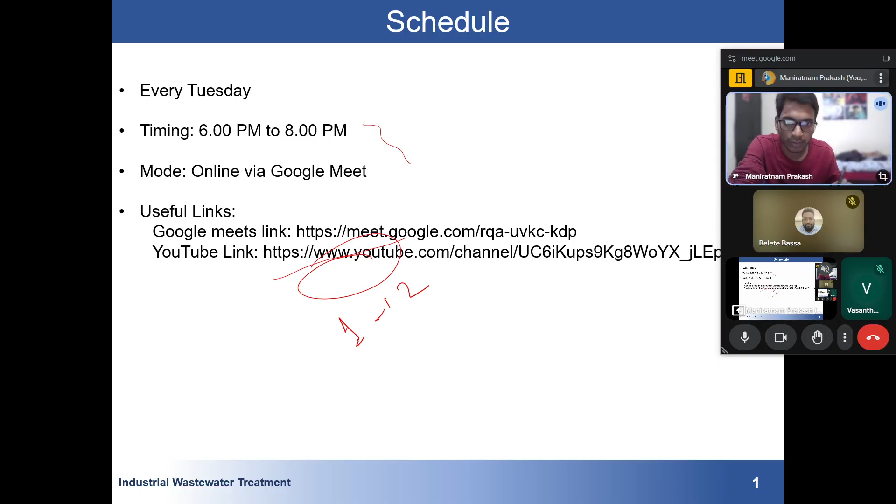Now, in week 12, we were looking at this last topic, about mine industry, whatever wastewater is coming from the mine. The topic was mine wastewater including acid mine drainage and industrial complexes for zero pollution attainment. If you have gone through the lecture, you will be seeing that they were talking about this mine industry.

So here also, like previously in whatever different industry we have seen, like textile or steel industry or tannery industry, everywhere we see that some kind of wastewater is being generated due to utilization of water. So here also in mine industry, there is some production of wastewater, and how that wastewater is being treated will be discussed here.

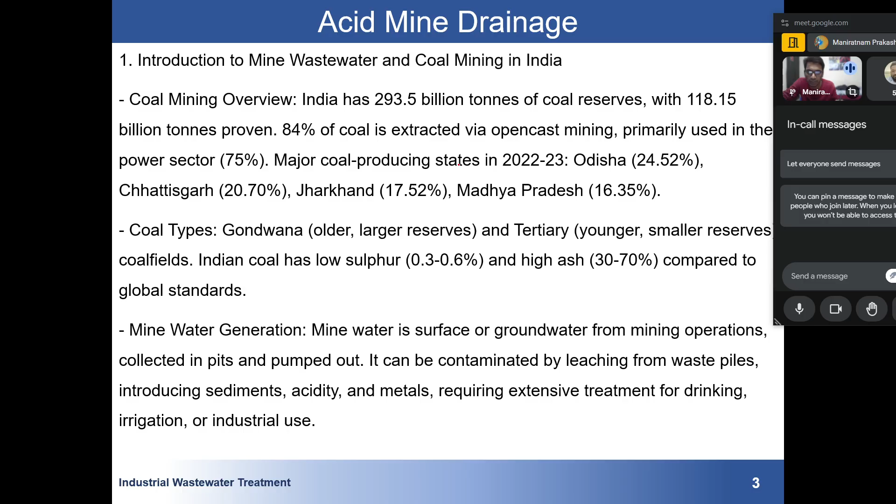Now there is a big misconception that Jharkhand has too much coal, but you can see that only 17% of the coal is produced from Jharkhand. Most of the coal is produced from Odisha, that is around 24%.

Then there are different types of coal, and how this type of coal is produced based on the carbon content. So how much carbon is there in our system, in our coal - based on that, these different types of coal are categorized.

So then we have this water generation. Mine water is surface or groundwater from the mining operation, collected in a pit and pumped out. It can be contaminated by leaching of the waste piles, introducing sediment and acidity.

So what happens - I was going through some internet resources on this - during mine operations, they dig underground and all these things. So when there is too much temperature, and too much dust also, to suppress all this dust and to cool down the surroundings, they use a huge amount of water.

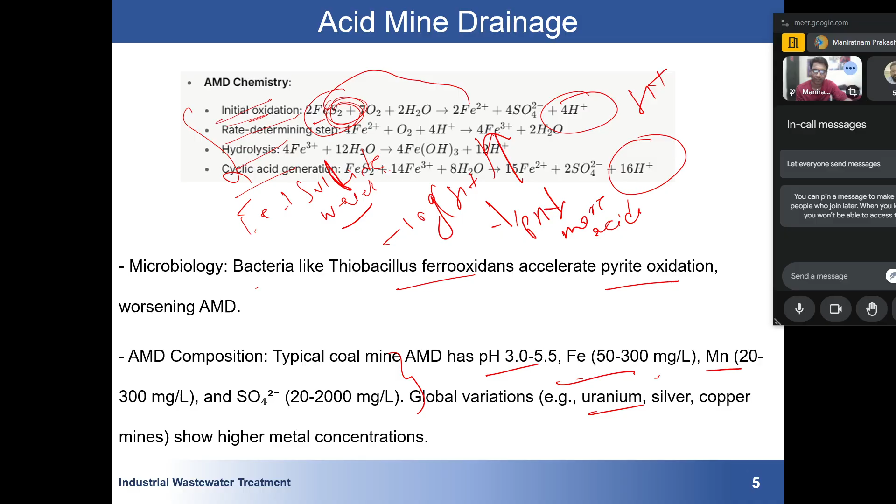So these are some of the concerns: it will contaminate our groundwater pH. Suppose this acid mine water somehow goes into the groundwater; normal pH is 7, so due to presence of high H+, the pH will go below 7 and make it more acidic. That is not good for our groundwater, because it will contaminate it. Eventually we are pumping out that groundwater only, so we have to treat it.

Lower the pH. Deposit of yellow boy, that is ferric hydroxide, which is yellow in nature. High metal concentration; acidic water is harmful for drinking, kills aquatic life, and all these things. So what are the different treatment technologies? For acid mine treatment, coagulation is there, then filtration, then use of limestone, and the process involves some reactions. Whatever reactions are involved are written in your lecture notes. This is just short notes, but for how this cleaning process is done, you can always refer to your class notes.

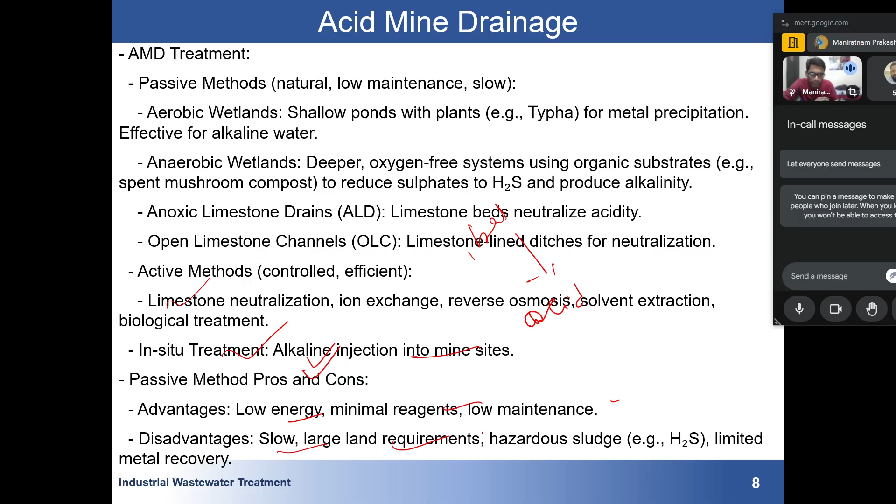Then we have AMD treatment also, that is acid mine drainage treatment. These are some of the processes; I am not going into this. We have in situ, where we treat it directly, then we have pump and treat method also, where we use limestone and all in situ. We know that our water is acidic in nature, so if we have acid, we can neutralize it by adding base or alkaline. That's why alkaline injection at the mine site. It's low energy, minimum reagent, low maintenance, but it is very slow and a large amount of land is required.

Then to treat industrial effluent, we have something called industrial complexes or common effluent treatment plant, CETP. There is something called STP, then we have CETP. Does anyone know what is STP and CETP? What is STP? What is STP and CETP?

Sewage treatment plant. Yes, correct. So what happened is that for our domestic purpose, domestic sewage goes directly to our STP, and there is treatment and all these things. But in an industrial area, for example in our Kanpur, we have an STP, but that has a smaller MLD value. Okay.

But as we know, we have the tannery industry here, and a huge amount of chromium or industrial waste is being generated. So to treat this specific kind of wastewater, the water is passed through the CETP. Common effluent: here industrial will be coming, domestic will also be coming, this water will be mixed up, and then it will go into the CETP and be treated.

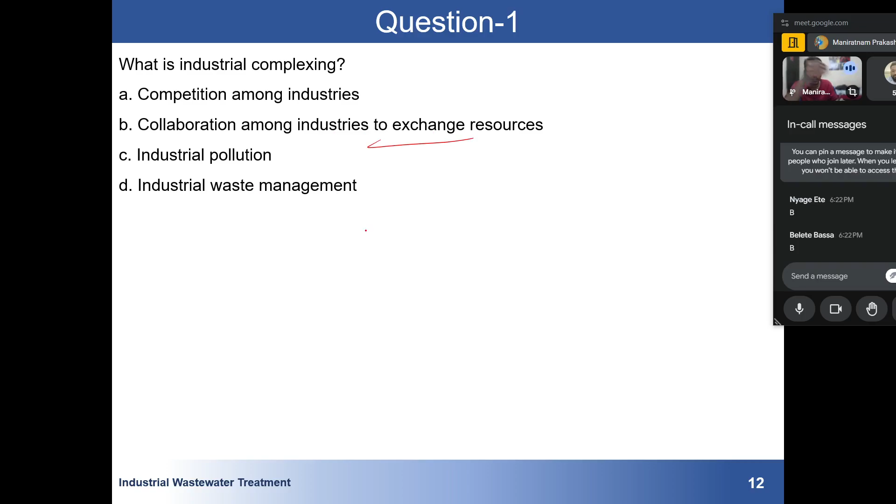What is industrial complexing? Anyone? B. Collaboration among industries to exchange resources. We got one answer. Yes, the correct answer is B, collaboration among industries to exchange resources. Industrial complexing refers to the strategic clustering of industries, for example cement, fertilizer, pulp.

Like we have industry A, B, C. There will be the original product of this industry and some byproduct, and this byproduct will be used as raw material for industry B, and so on. The most common example is the sugar industry and paper making industry: the pulp generated is used as raw material for the paper industry. Cement, fertilizer, sugar, pulp and paper share resources, byproducts and waste streams. For one industry it may be waste, but for another it may be raw material, so sharing gives mutual benefit.

For example, fly ash from the power plant can be used as raw material for cement production. In power plants a huge amount of fly ash is generated because of burning coal, and this burned material can be used as raw material for cement, minimizing waste and treatment costs. The collaborative approach enhances sustainability and often involves shared infrastructure such as CETP to manage wastewater collectively.

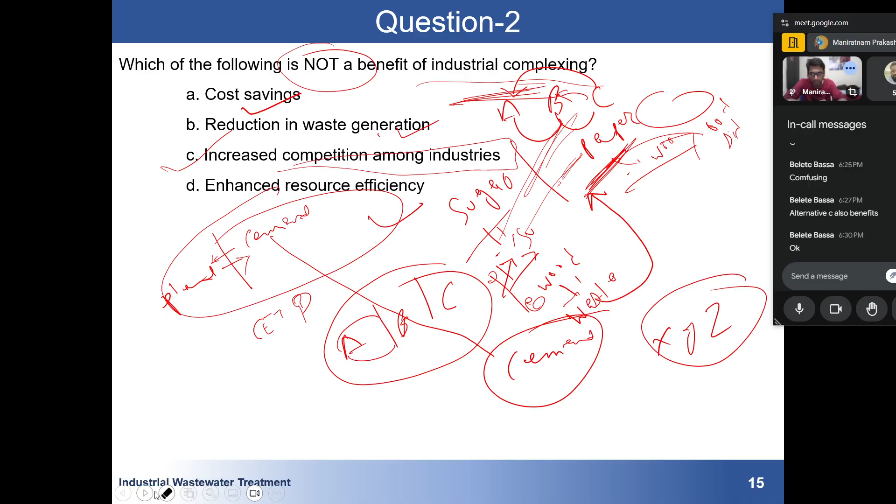So the correct answer is increased competition. Industrial complexing involves collaboration among industries to share resources, byproducts, and infrastructure such as CETP to optimize cost saving. The benefits include cost saving, reduction in waste generation, and cost sharing because shared treatment facilities reduce the individual cost. Suppose A has to build their own CETP, B has to build their own CETP. So there will be some external cost.

So there will be cost cutting and reduction in waste generated. The waste of this may be used as a raw material for that industry, and enhanced resource efficiency, recycling water within the complex. However, increased competition is not a benefit, as complexing fosters cooperation to achieve mutual gains. I don't want two cement industries. Two cement industries can never be doing industrial complexing. Either it will be paper, sugar, cement, power plant, like this.

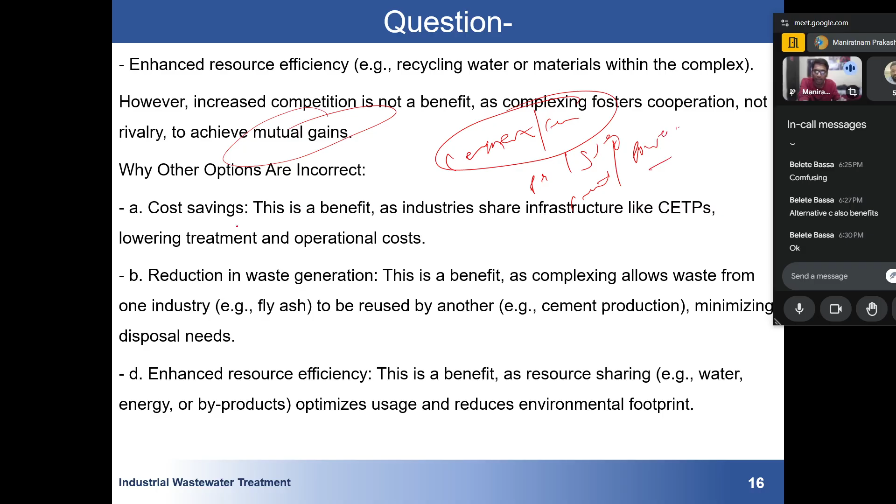Why are other options incorrect? We have said it already. So the correct answer is C, increased competition among industries. Question number 3. Industrial complexing promotes.

It is asking about promotion. A. Yes, circular economic principle. Correct, the correct answer is circular economic principle. Industrial complexing promotes collaboration among industries to exchange resources, byproducts, and waste streams, aligning with the circular economic principle. The example is the same. All three questions were similar questions; it has just been asked in a different form.

Okay, now in a circular economy, resources are reused, recycled, and kept in circulation to minimize the waste and environmental impact. For example, in industrial complexing, one industrial waste, fly ash from the power plant, can be used as a raw material for cement production, reducing the need for virgin resources and landfill disposal. So the cement industry won't be going anywhere else to get their raw material, or it won't be affecting the natural raw material. It will be just taking the waste material that is produced from the power plant.

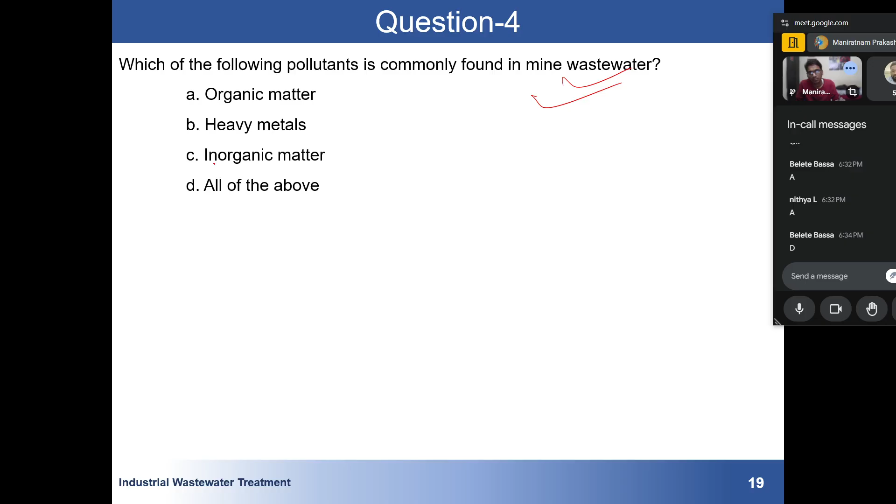Question number 4. Which of the following pollutants are mainly found in wastewater? This we discussed a few minutes ago when I was recapping. D, all of the above. Yes, correct. Mine waste originates from surface water, groundwater, and process water in mining operations, and can contain a variety of pollutants depending on the mine type, geology, and activity. Characteristics of mine water include acid mine and alkaline mine water, and collectively include organic matter. We have seen that COD and BOD were very low, which means there is a small amount of organic matter, but it is there.

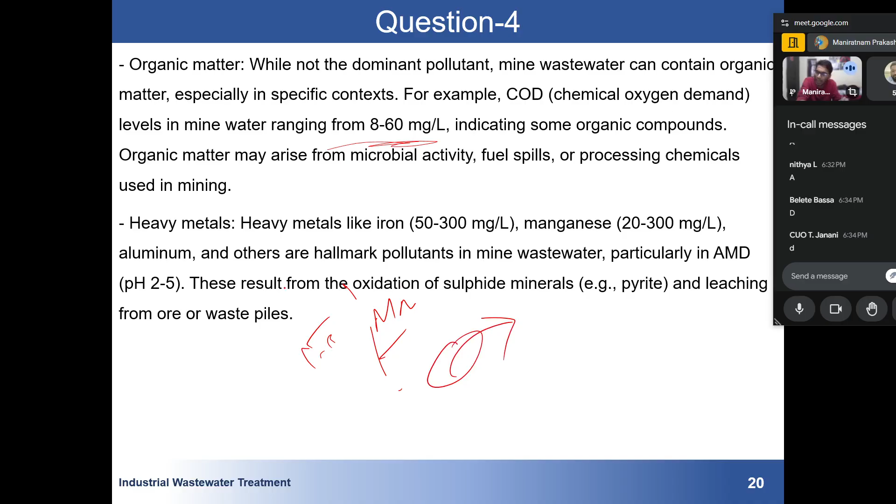And we know that in our wastewater, in our soil, we have a very small amount of organic matter. So you can see that it is ranging between 8 to 60 milligrams per liter. Heavy metals: we know that iron, Mn, manganese, all these minerals are there in our soil, and they will leach out. So heavy metals are also there. Then inorganic matter: there is a huge amount of inorganic matter, sulfate, chloride, iron, magnesium, and these are also inorganic matter. Since mine wastewater comprises all these pollutants, organic in very small amounts, heavy metals, inorganic matter, all of them are accurate when considering the broad scope of mine wastewater characteristics.

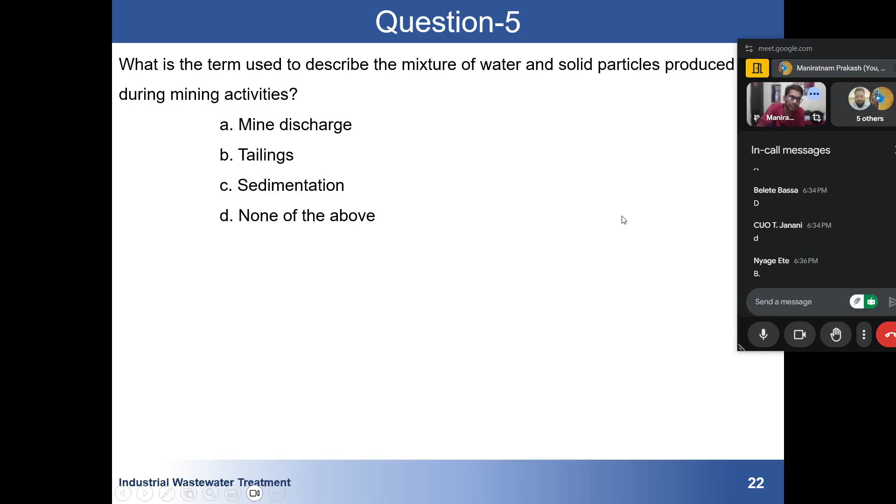Question number 5. What is the term used to describe the mixture of water and solid particles produced during mining activity? What is the term used to describe the mixture of water and solid particles produced during mining activities? Okay, B. Yes, the correct answer is B.

So, tailing is the term used to describe the mixture of water, fine solids, and residual chemicals produced during mining activity. Tailings are generated when ore is processed to extract valuable minerals, leaving behind a slurry of ground rock, water, and sometimes chemicals used in the process. We know that the raw material for any mineral is called ore. So to extract any element, suppose aluminum, first we make a slurry, and there are other processes that we are not going into. But whatever is present in this ore will be dissolving in that water. So it will produce a huge amount of suspended solids, solid particles. So this is called tailing.

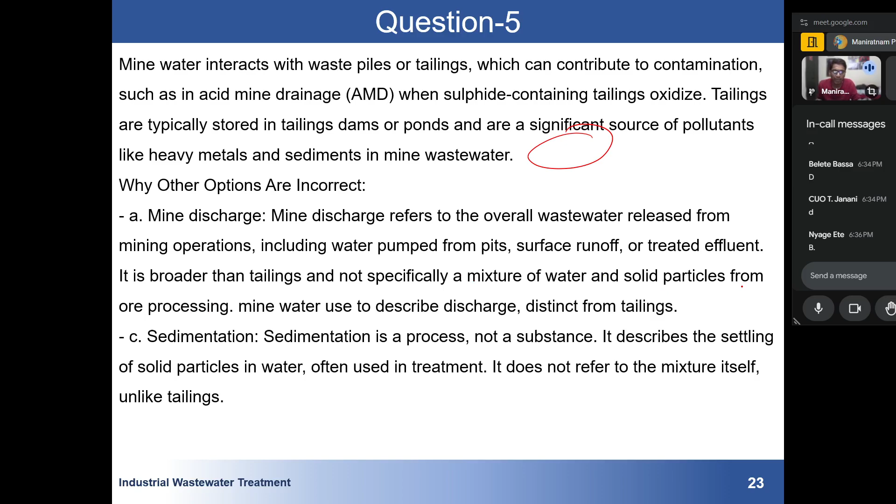Mine water interacts with waste piles or tailings, which can contribute to contamination such as acid mine drainage, where sulfide-containing tailings are oxidized. Tailings are typically stored in tailing dams or ponds and are a significant source of pollutants like heavy metals and sediment, because a huge mixing has been done. Mine discharge is a different thing. Mine discharge refers to the overall wastewater released from the mining operation, including water pumped from the pits, surface runoff, or treated effluent. It is broader than tailing and not specifically a mixture of water and solid particles from ore processing. Mine water is used to describe discharge distinct from the tailings. Sedimentation, we also know: settling. It describes the settling of solid particles.

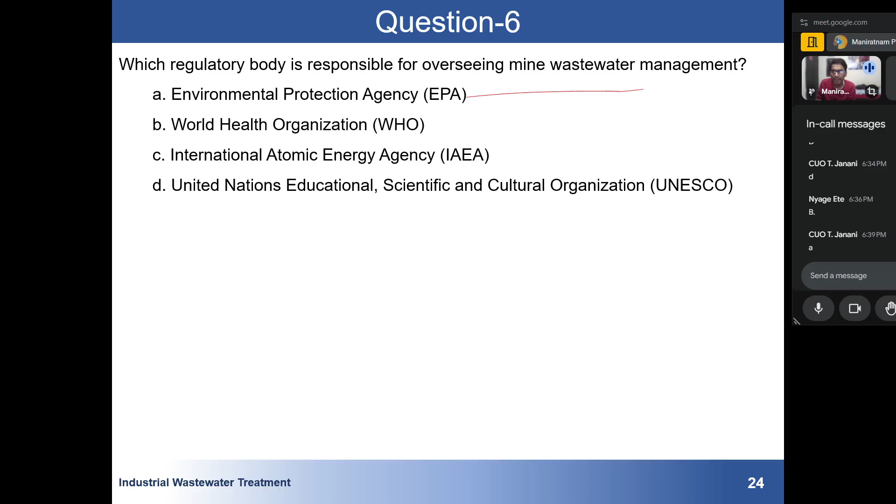Question number 6. Which regulatory body is responsible for overseeing mine water management, mine wastewater management? A. EPA. Yes, correct. EPA.

The Environmental Protection Agency is the primary regulatory body responsible for overseeing mine wastewater management in the United States. EPA enforces regulations under laws like the Clean Water Act, which govern the discharge of pollutants into water nationally. This is not much science, but you should know what EPA is, how EPA works, and for what purpose WHO, IAEA, and UNESCO work.

So EPA also regulates mines, under this thing. Then coming to the other option, what is WHO? The WHO focuses on global public health. It works on health, so whatever health news you might have heard, you will be hearing from WHO. It sets guidelines for drinking water quality, health-related environmental substances, whatever drinking water limits you have.

So if you have read any research paper, you might have seen two things. Suppose they are talking about fluoride. You will see it is always written as per, suppose you are reading in India, then it will be written as per WHO and Indian standard code, IS 10500, the limit is 1.5.

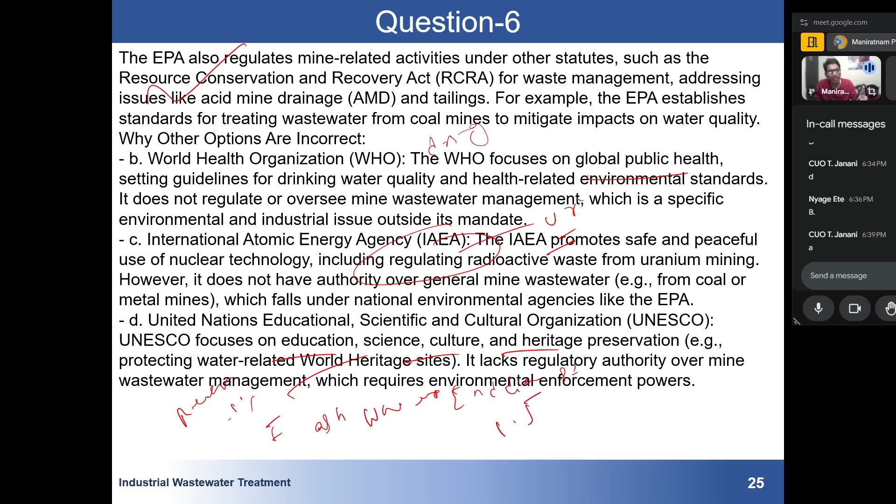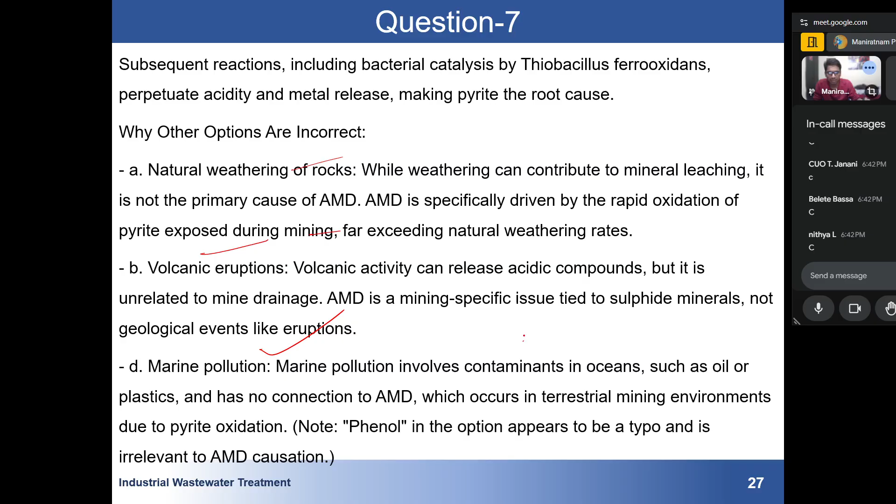Why are the other options incorrect? While weathering can contribute to mineral leaching, it is not the primary cause of AMD. AMD is specifically driven by the rapid oxidation of pyrite, which we have seen. Volcanic activity can release acidic compounds, but it is unrelated to mine drainage. AMD is a mining-specific issue tied to sulfide minerals, not geological events like eruptions. Marine pollution involves contamination in oceans; it's not related to AMD. So the correct answer was C, that is due to pyrite. I hope this is clear to all.

What role do bacteria play in acid mine drainage? Bacteria neutralize acid mine water. Bacteria have no effect on mine water quality. Bacteria promote the growth of aquatic plants. Bacteria oxidize pyrite to form acid mine drainage. D.

Yes, correct answer is D. Bacteria oxidize pyrite to form acid mine drainage. Correct answer. Bacteria, particularly this species and other acidophilic species, play a significant role in acid mine drainage by oxidizing pyrite to form acidic conditions.

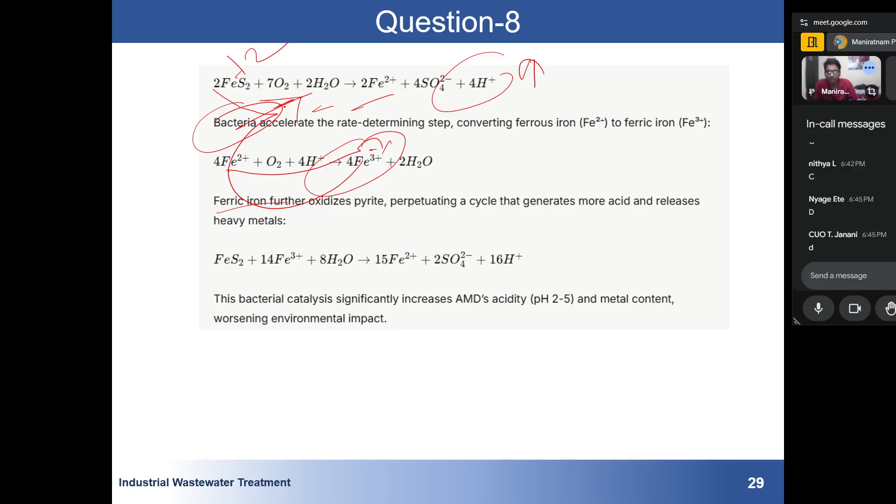Finally this reaction goes in a cycle. Again we have Fe2 plus, and you can see H plus is also releasing here, so pH is decreasing too much. Now this bacterial catalysis significantly increases the mine drainage acidity, pH 2 to 5, and metal content, worsening the environmental impact.

I hope this is clear. Everyone should be familiar with this reaction of pyrite in the mining industry.

Which of the following is not a conventional method for treatment of acid mine drainage? Electrochemical treatment. Anyone else? And we have got one saying aerobic wetland system, someone is saying B also. So we have got two answers, B and C.

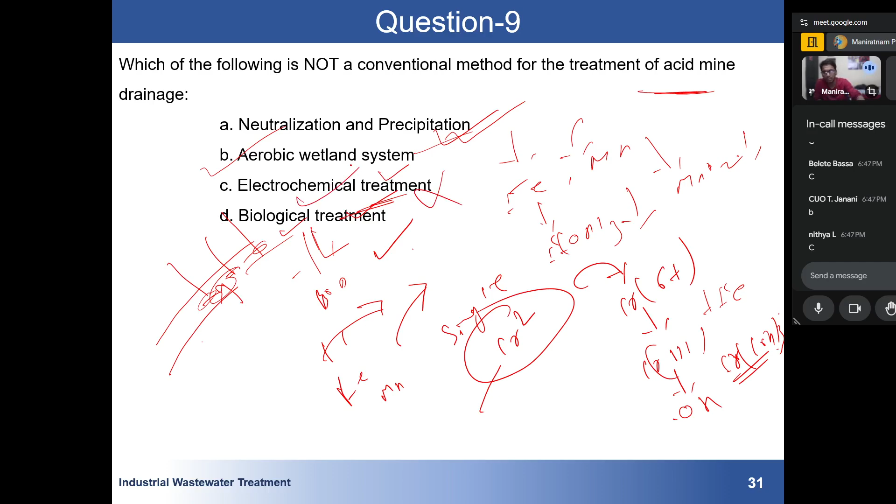Electrochemical treatment. Conventional methods for treating acid mine drainage focus on neutralizing acidity, precipitating metals, and removing contaminants using a stable, widely used process. Based on this context, we covered this.

You can see that neutralization and precipitation involve alkaline agents like limestone. When we add limestone, calcium hydroxide, it will raise the pH, around 10 to 12. At this pH a huge amount of OH minus will be there, so Fe will react with OH to form Fe(OH)2, and if Fe3 is there, Fe(OH)3 will form, and this will precipitate. So yes, neutralization is done this way.

Aerobic wetland systems are passive treatment, shallow, with the help of plants to oxidize and precipitate metal iron, commonly used for near neutral or less acidic mine water. We have seen what wetland is. Water is passed through, and whatever contaminant is there gets entrapped in the plant. Biological treatment is correct, as we have BOD and COD in our water, we have organic matter in water.

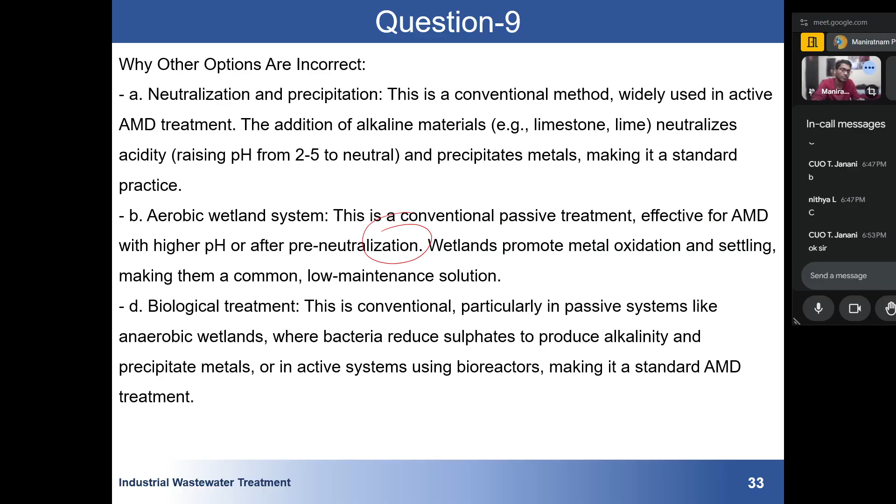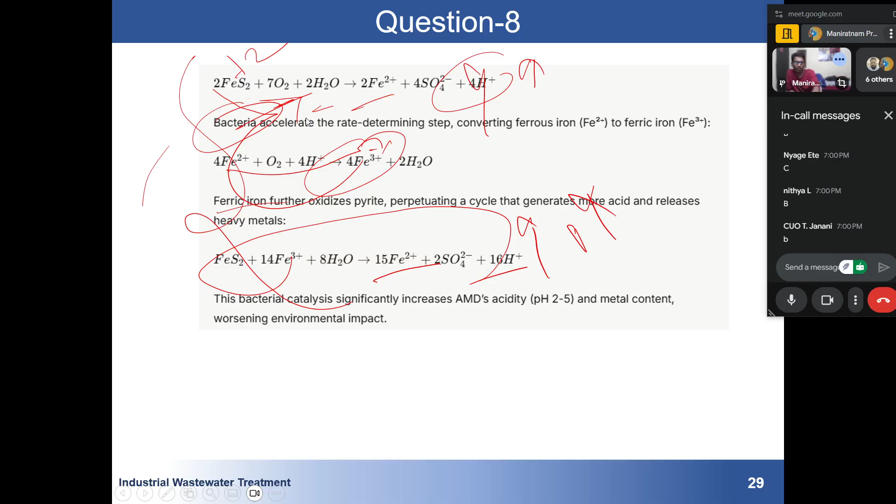But this Fe3 plus, if we somehow remove it, production of sulfate can be controlled. So that is not the limiting thing. The determining step is this itself, the presence of H plus and O2. So I hope the ones who were saying this...

C, and also not a huge amount of sulfate is being produced, very less amount of sulfate is being produced. The main thing is the presence of oxygen and H plus.

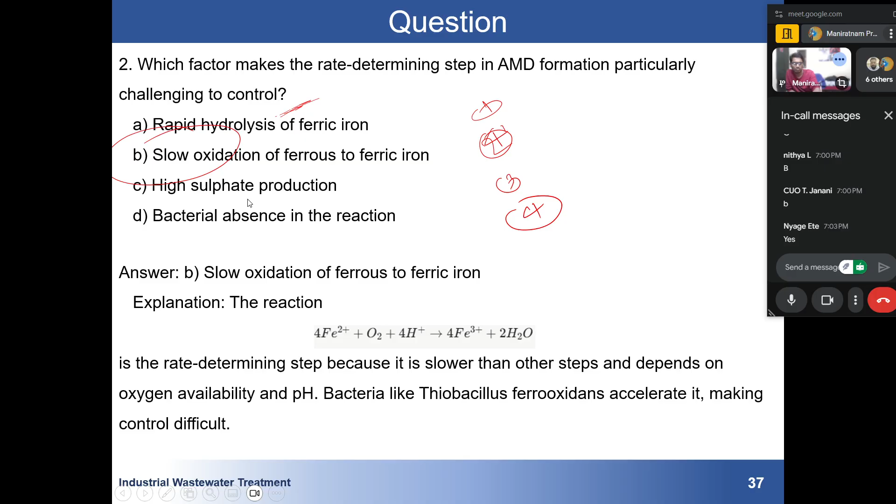Did you get it? Those who were saying C, the problem with sulfate production controlling is that it's not the right step, because sulfate production can be controlled by controlling Fe3 plus, which can be easily controlled by adding alkaline agents and similar methods. I hope you've got it.

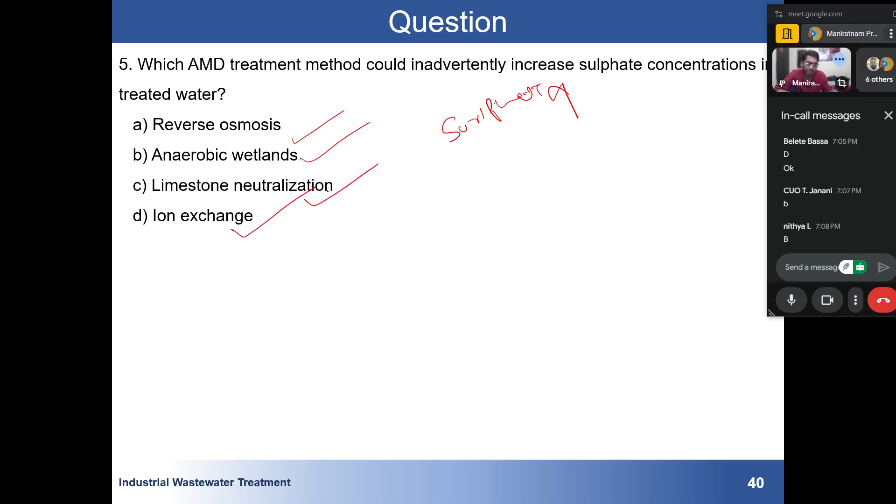We have seen reverse osmosis, anaerobic wetland, limestone neutralization, and ion exchange. Anaerobic wetland reduces sulfate to hydrogen sulfide, but incomplete reduction, reoxidation, or downstream processes can increase sulfate levels. This tricky scenario tests understanding of microbial processes and their limitations. So yes, the correct answer is B, anaerobic wetland.

Because of oxidation and reduction, first sulfate gets transferred to hydrogen sulfide, but again due to reoxidation, there is an increase in sulfate concentration.

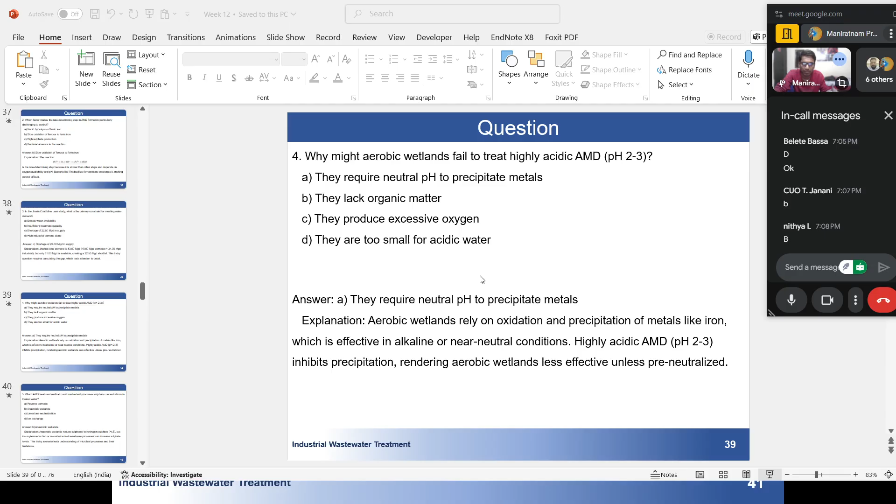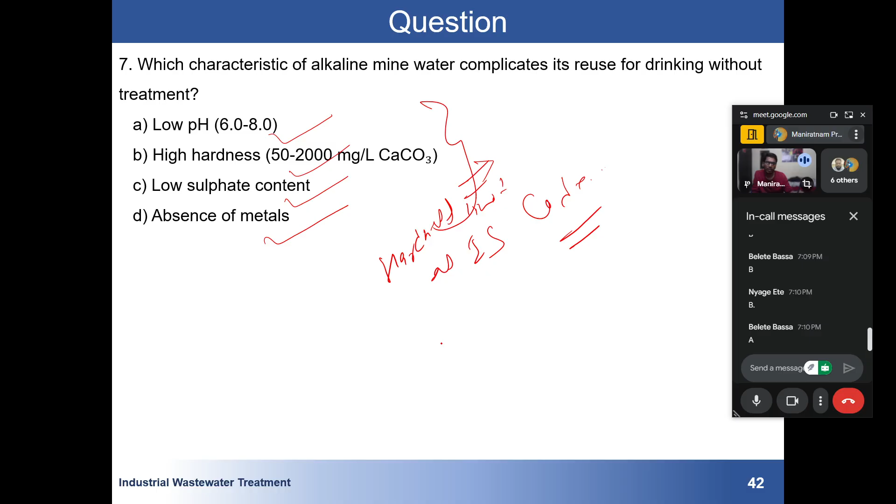B, high hardness. What is the hardness limit, as per WHO, as per our IS code? What is the permissible limit of pH also? Acceptable limit. There is no permissible limit of what? What is the acceptable limit of pH? Does anyone know? Limits of hardness and limit of pH. First, say about pH. What is the limit of pH? Anyone?

Anyone? Is it 6.5 to 8.5 or 7.5? I think it is 8.5. Is this an acceptable limit or a permissible limit? This 6.5 to 8.5, is it acceptable or permissible? You can unmute yourself. No, incorrect. This is not permissible. This is acceptable. pH does not have any permissible limit.

Remember, generally, if you see the IS code, there is an acceptable limit and then there is a permissible limit. Permissible limit is in absence of alternate source. For pH, the limit is written as 6.5 to 8.5, and in permissible limit there is a blank. So this is a common misconception. Many people say that 6.5 is acceptable and 8.5 is permissible. No, that is also incorrect. There is only acceptable. We will only accept water which has a pH range of 6.5 to 8.5, nothing else, not more than that. There is no permissible.

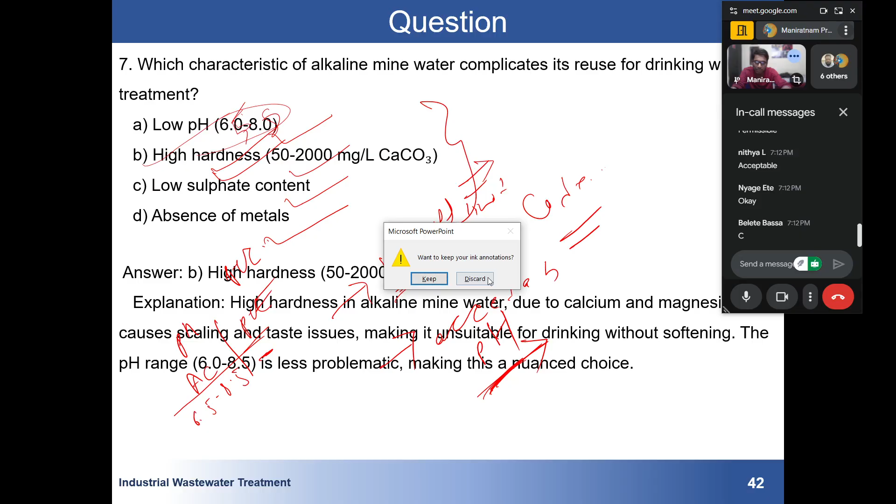This can be a problem, but it is not a very big problem. But this option is also incorrect. It should be 6.5 to 8.5. Then definitely the answer would have been B. Low sulfate content: sulfate should be very low in our water, not high. Let me open the drinking water limits, IS 10500.

You can see this: acceptable or requirement limit and permissible limit. For pH, you can see that it is between 6.5 to 8.5, no relaxation. Similarly, for hardness, total hardness, acceptable is 200 and permissible is 600. We will be accepting water having hardness of this much, and we will be rejecting water having hardness above 600.

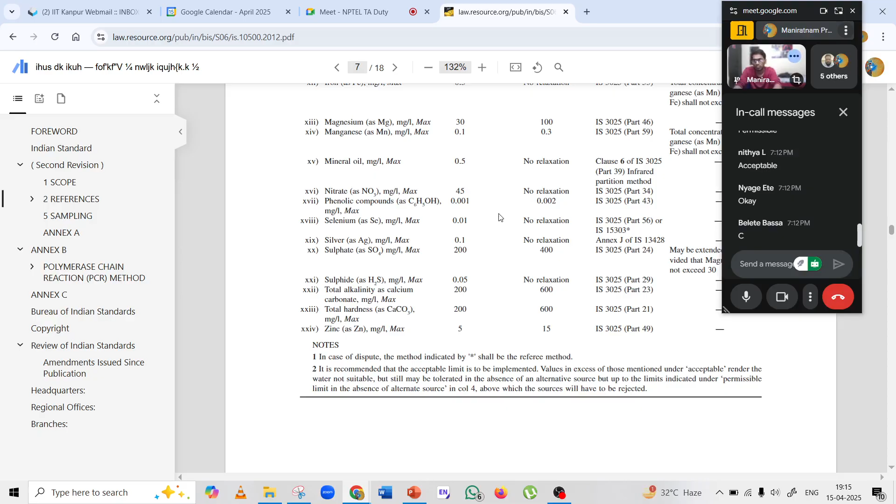When I was appearing for one interview, there was a question: suppose every parameter is within the drinking water limit, but hardness is a little bit high, say 1000 milligram per liter as CaCO3. Will you drink that water? Can anyone answer? Yes or no? Correct answer is no. Even though the hardness is only a little bit high, we won't be drinking it.

And remember one more thing, there is a misconception that drinking hard water can cause kidney stones. This is also a misconception. I don't know the exact explanation of how hard water does not cause it. The misconception is that hard water contains a high amount of calcium and kidney stones are also made of calcium. But formation of kidney stones depends upon many things, like something called oxalate.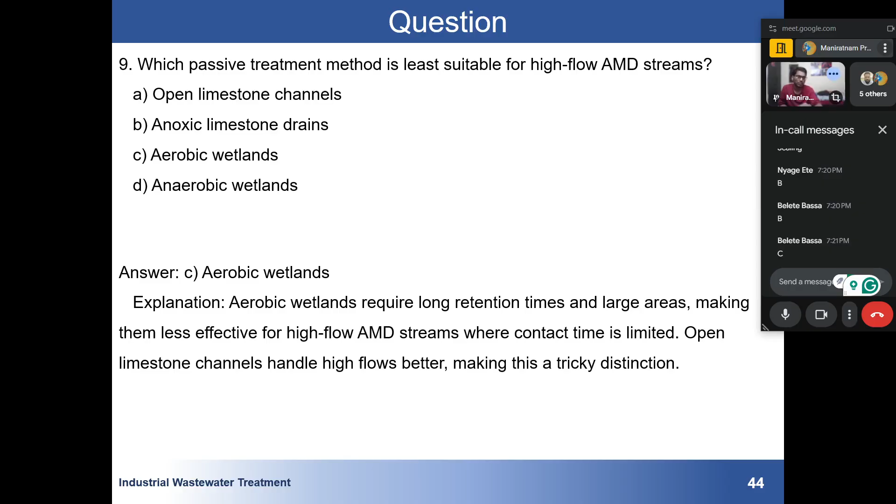But in aerobic, there is involvement of oxygen, and this presence of oxygen makes the reaction slow. So a huge retention time is required, so that's why the correct answer is C.

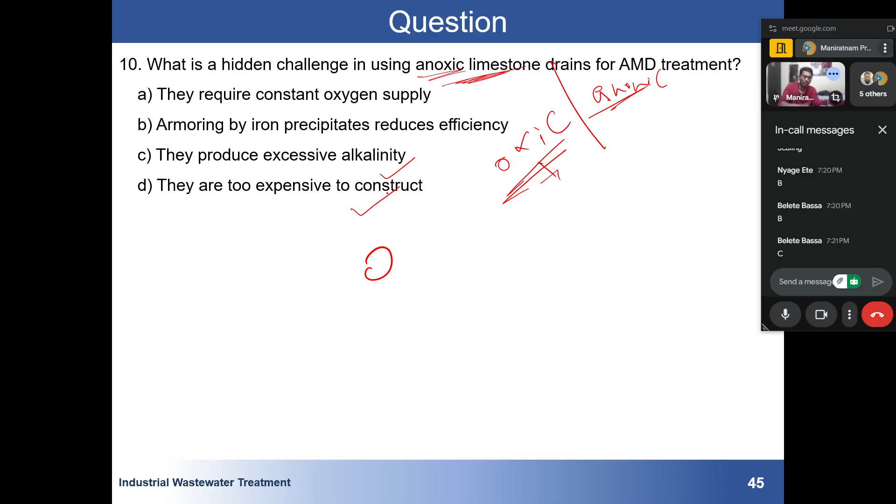What is the hidden challenge in using an anoxic limestone drain for AMD treatment? If we are using anoxic limestone, first of all, what is anoxic limestone? There is oxic, and the name itself suggests anoxic. Oxic means in presence of oxygen, anoxic means in absence of oxygen. So, what is the challenge? Okay, I will say the answer. Armoring by iron precipitate reduces efficiency. The iron precipitate can coat the limestone in the drain, forming an armoring layer that reduces contact with acid water, lowering the neutralizing capacity.

So what happens is the challenge is due to this iron. See, my water is here. If we want to add this limestone, then there should be a proper interaction. But due to this iron, there is a protective layer of iron. This layer reduces the contact time. The contact is reduced by the iron, so there is no proper interaction.

So overall, this reaction is not happening between H+ and OH-. H+ is already in the water, OH- is coming from the limestone. So overall efficiency decreases. So the correct answer is B. Armoring by iron precipitate reduces the efficiency. This iron precipitate is in the form of ferric oxide and all these things.

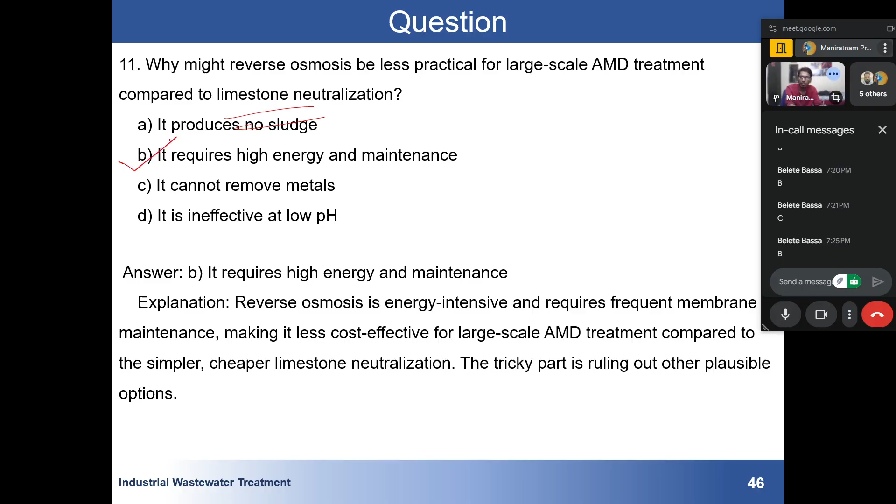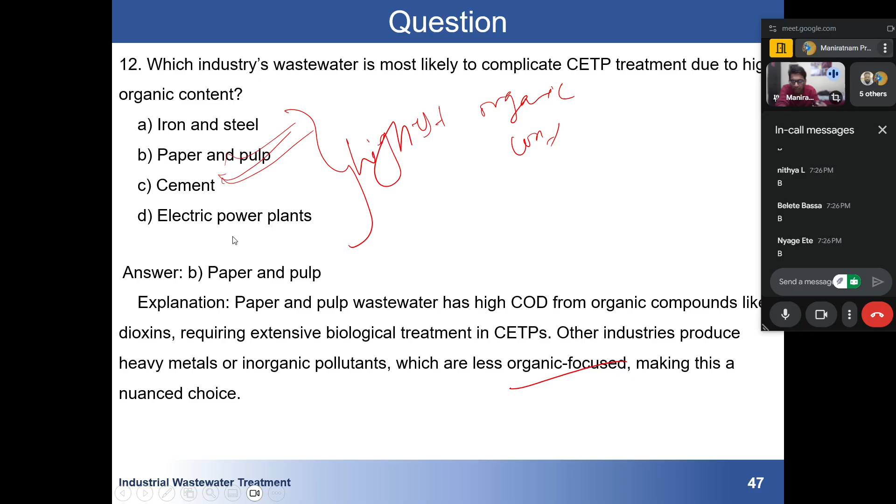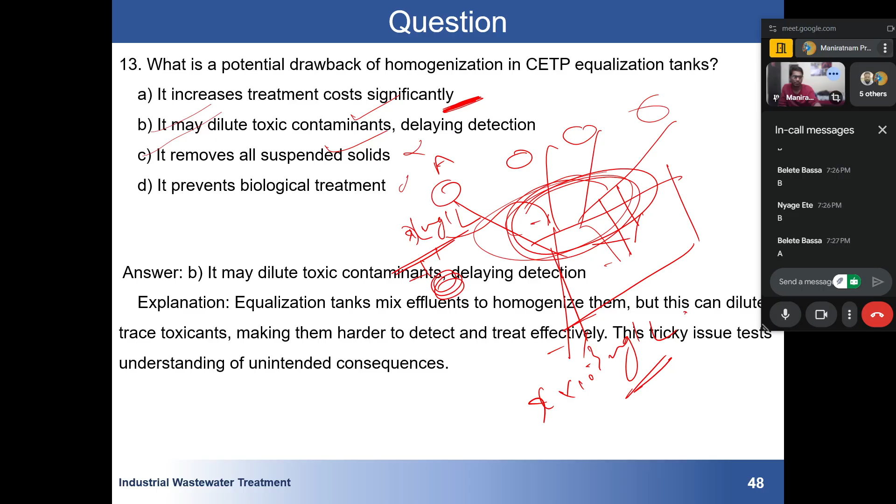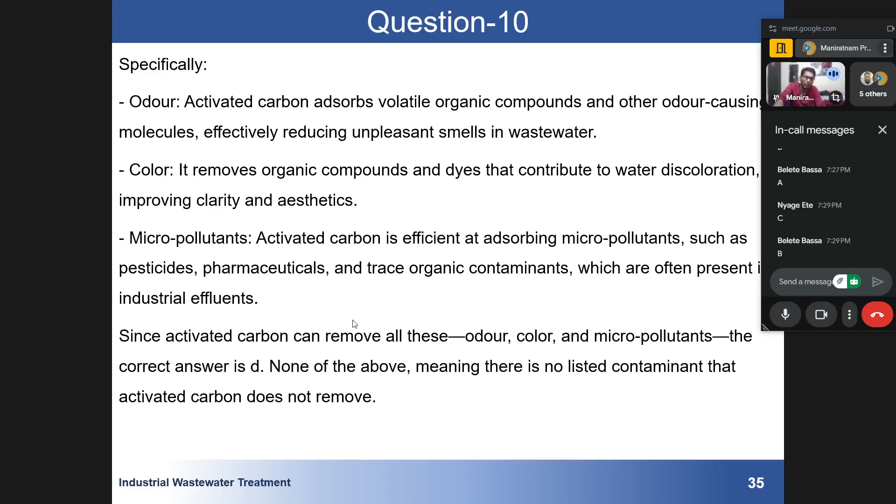Let's see. They are designed for organic adsorption. Activated carbon filters excel at removing organics. See, we have seen this thing in question number 10. Question number 10 we have seen specifically color, odor, micropollutants. You can see only organic things are being removed, and trace organic contaminants. Only organic; this is not used for inorganic contaminants. So I hope you have got it.

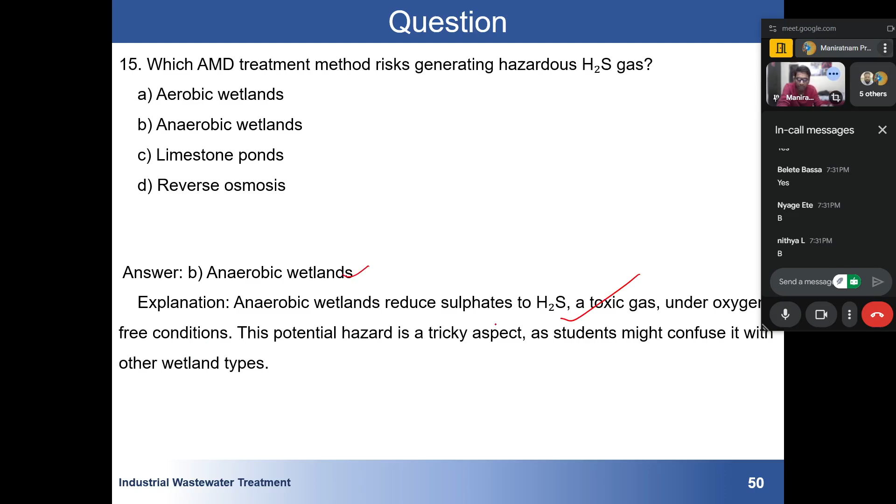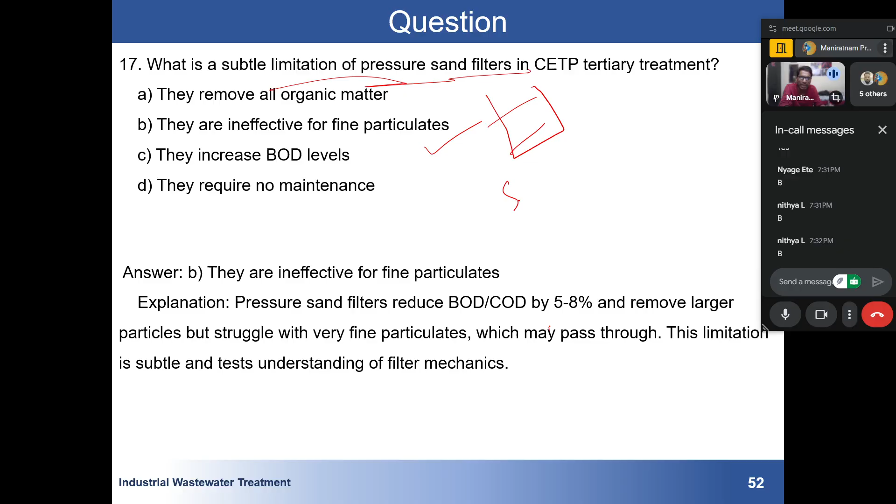What is the limitation of a pressure sand filter in CETP? We know that we have sand filters: rapid sand filter, slow sand filter. So what is the limitation? They are in fact ineffective for fine particles. Pressure sand filters reduce BOD and COD and remove larger particles, but struggle with very fine particles which may pass through. Generally the sand filter is not suitable for fine particles.

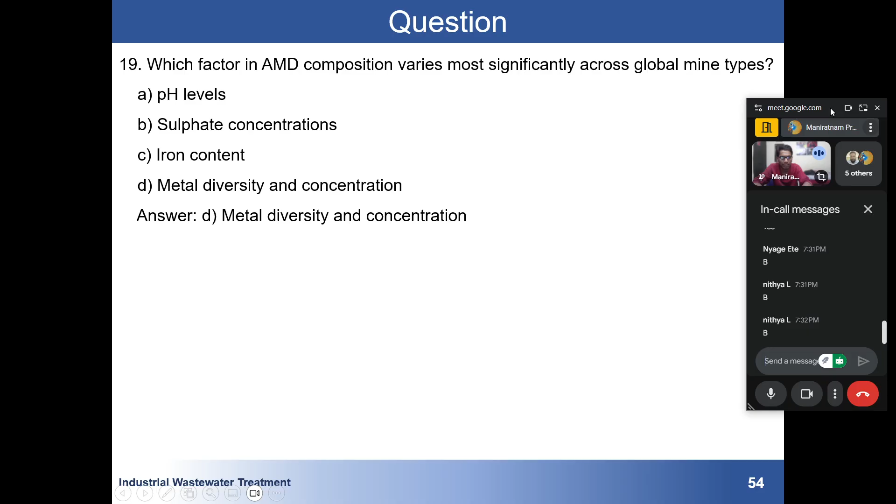Which factor in AMD composition varies most significantly across global mine types? Again, the answer is already written: metal diversity and concentration. While pH, sulfate, and iron are consistently high in AMD, the types and concentrations of metals vary widely depending upon the mine. So the composition of AMD varies significantly.

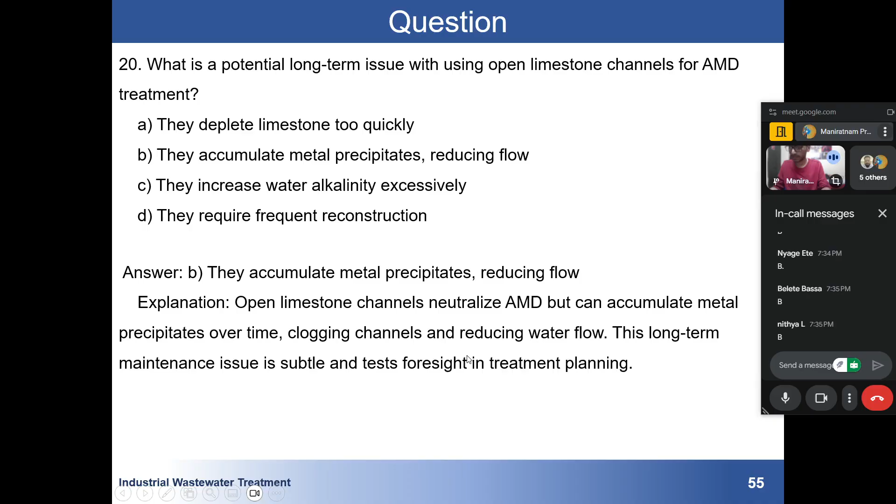I have 20 more questions. I will be going like this only. So before proceeding further, does anyone have any doubt? In week 3, yes. They have not responded yet. I have already mailed them. No, in the PPT. Okay. What is the problem in week 3?

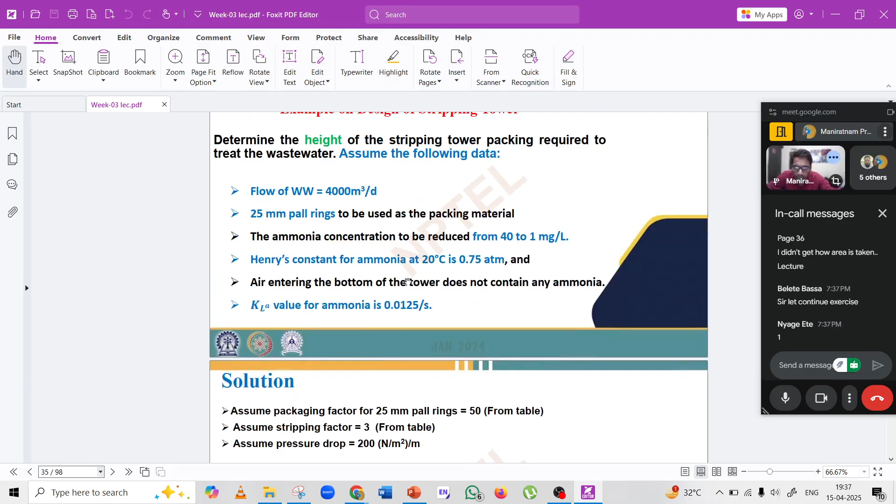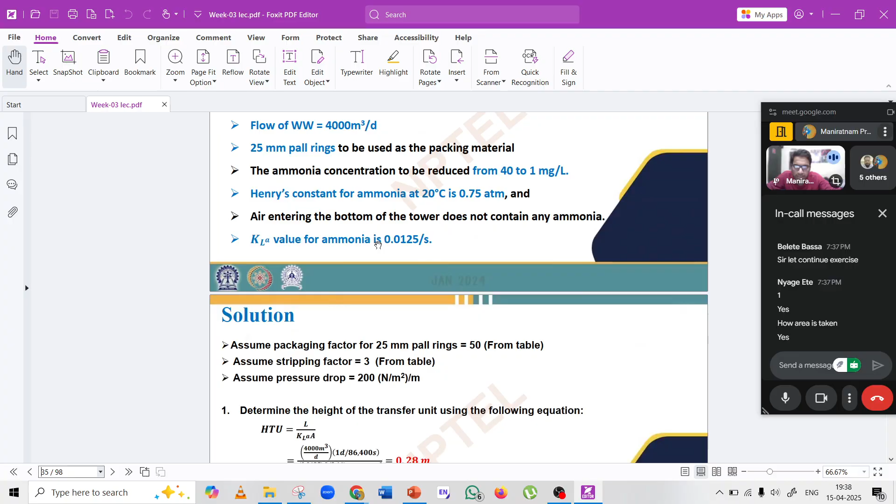Page 36. Let me open. My PPT or the lecture note PPT? Page number 36, this page. Example of design of a stripping tower. The height of the stripping tower, the flow, the Henry constant are given. Determine the height of transfer unit using the following equation, HTU. So what's the problem here? How is the area A taken? I think they have given you the diameter. Let me check.

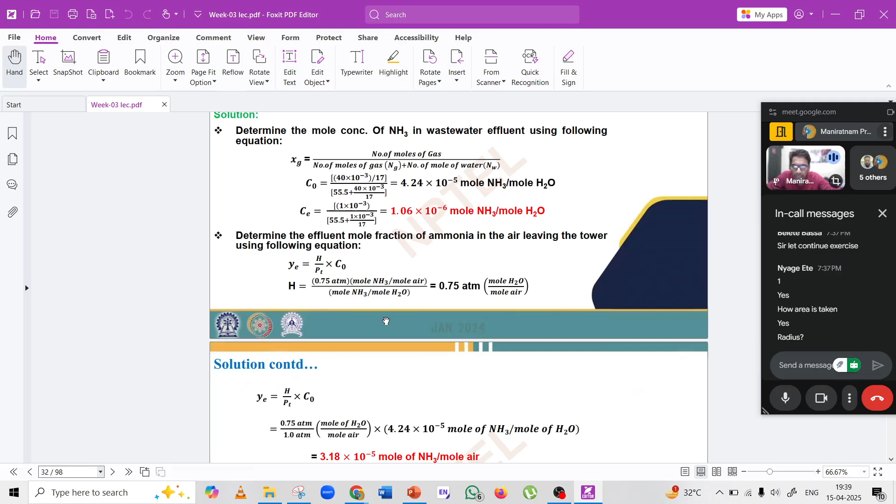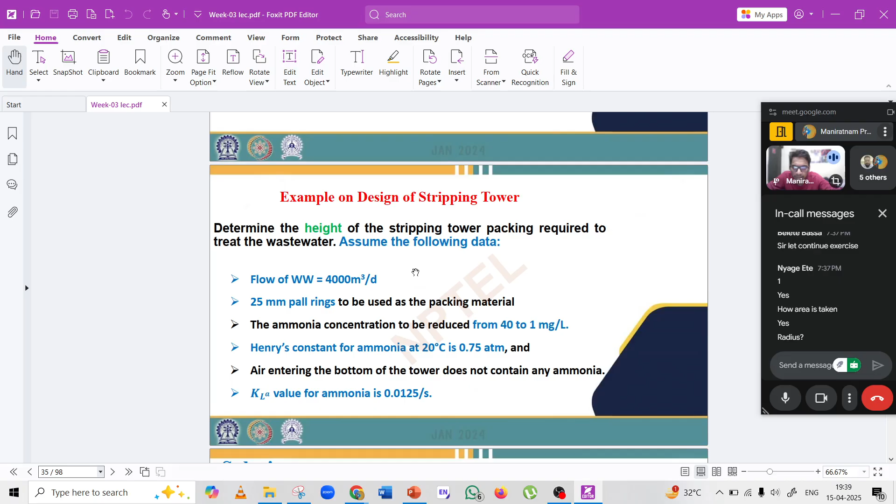L is in meters, 0.035 by 4 r square. So they must have given you the diameter or radius. Let me check: they must have said something about the radius. This is another question: Henry constant, G/L, air required, determine the height of stripping tower. KLa value of ammonia is this much, assuming the packing factor, stripping factor 3, and pressure drop.

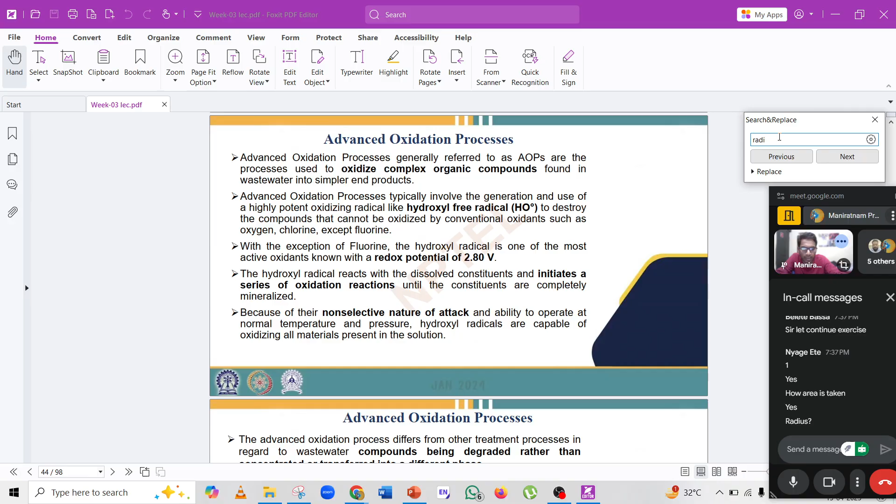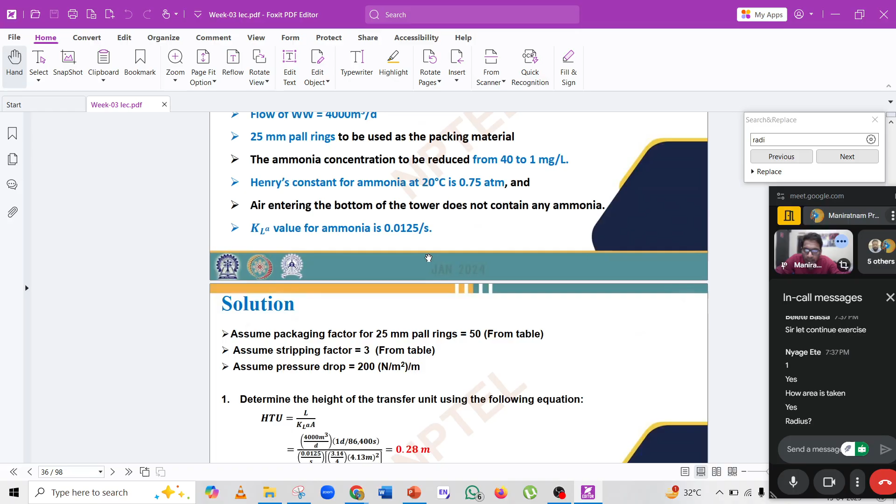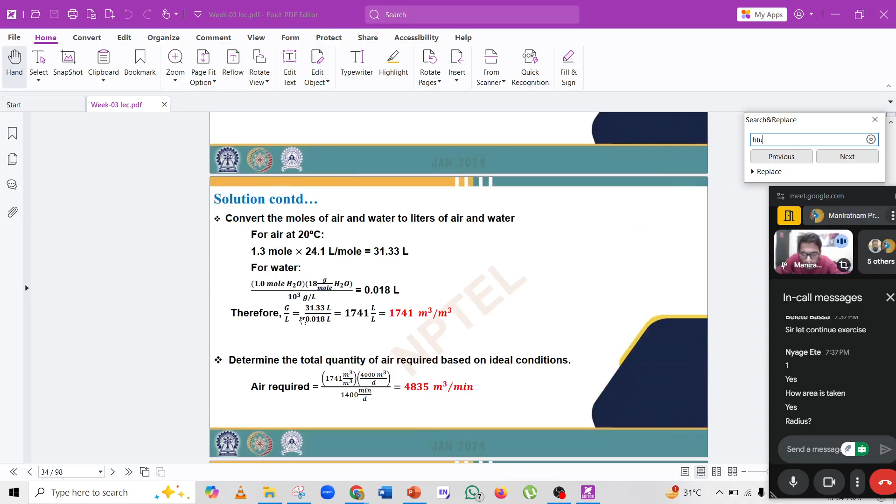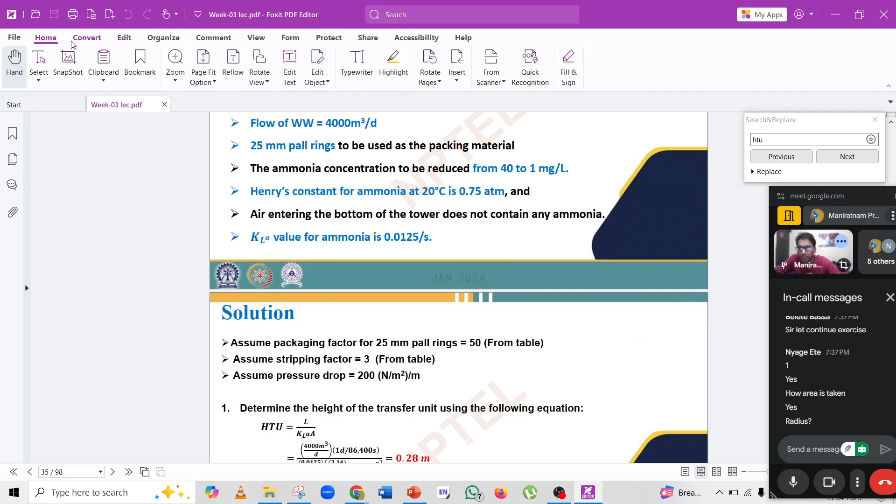I think I have solved a similar type of question; let me check my PPT. Cross section area of the tower. How to find the cross section area of the tower? I'm also not getting where this radius has come from. L is given, flow is given, KL is already given, pi r square; r you have to get.

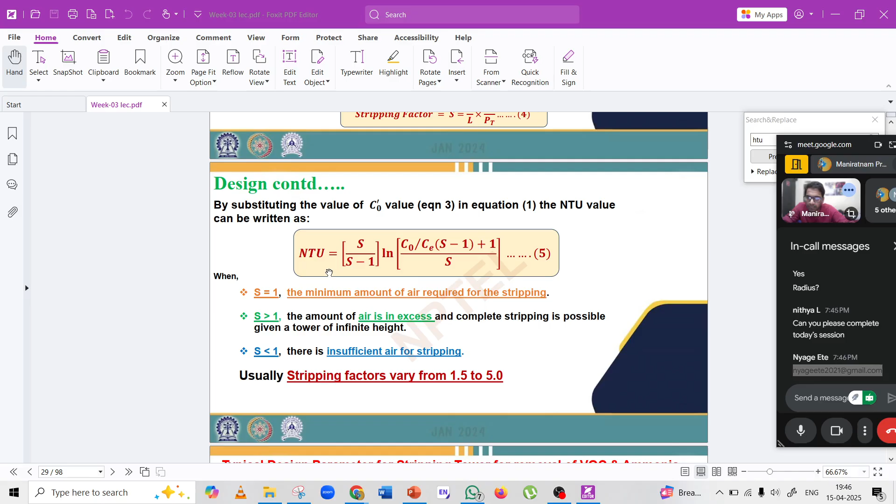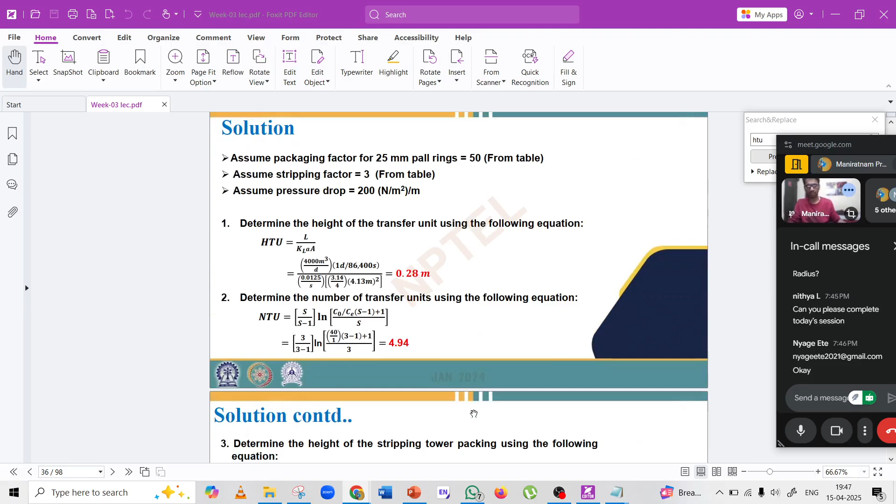Okay, I will share. Right now I am not able to get how this radius was taken, but once I go through the notes, then I will let you know. Okay. Sorry for this thing. I am also not getting where they have taken this. So instead of that, I will look into it after some time.

Okay, so coming to these. What is the primary source of mine water in coal mining operation? This is surface and groundwater from mining pits. Then which state had the highest coal production in 2022-2023? Again, this was a very easy question. Odisha. Yes, Odisha has registered. What is the key characteristic of Indian coal as compared to developed countries? Indian coal, B, low sulfur and high ash. Yes, correct. This is correct.

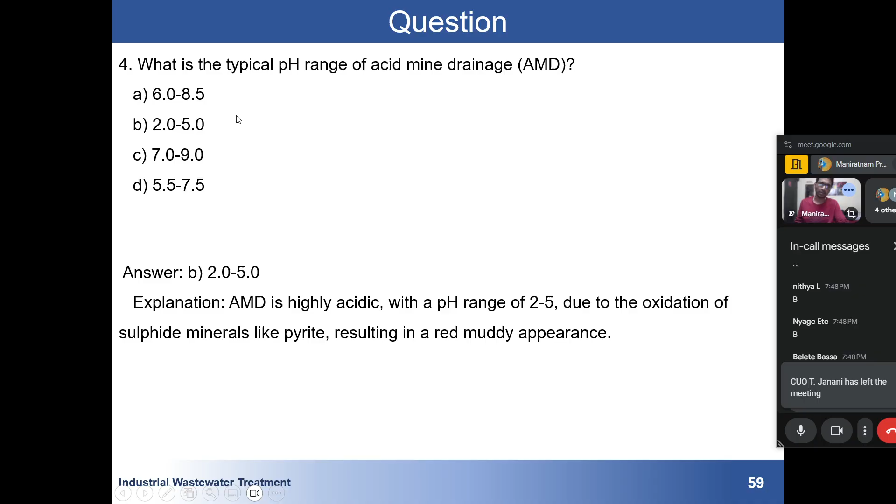What is the typical pH range of acid mine drainage? As it is saying acid, there is only one option related to acid, and that is between 2 to 5. So B is the answer. Which bacterium accelerates the oxidation? Thiobacillus ferrooxidans. This one, B. So this is correct.

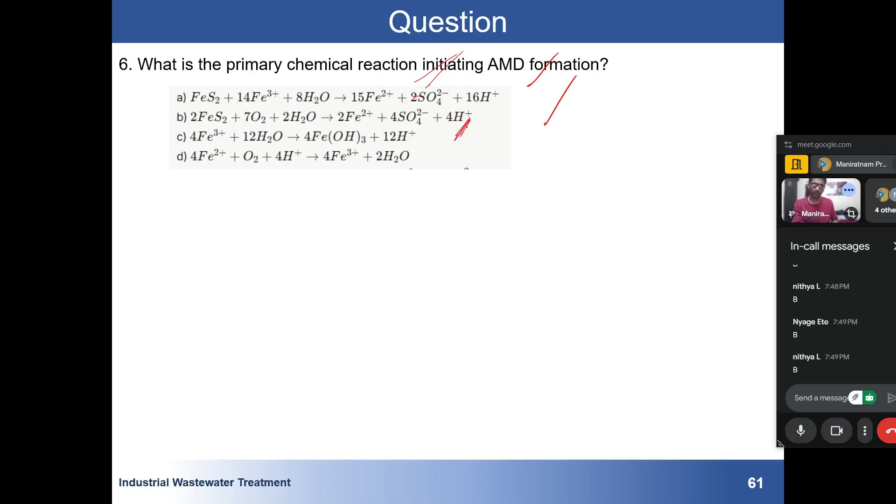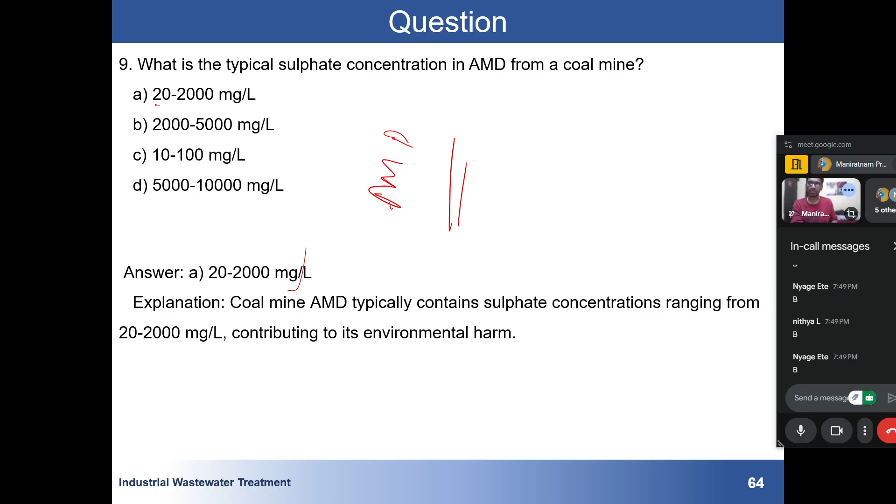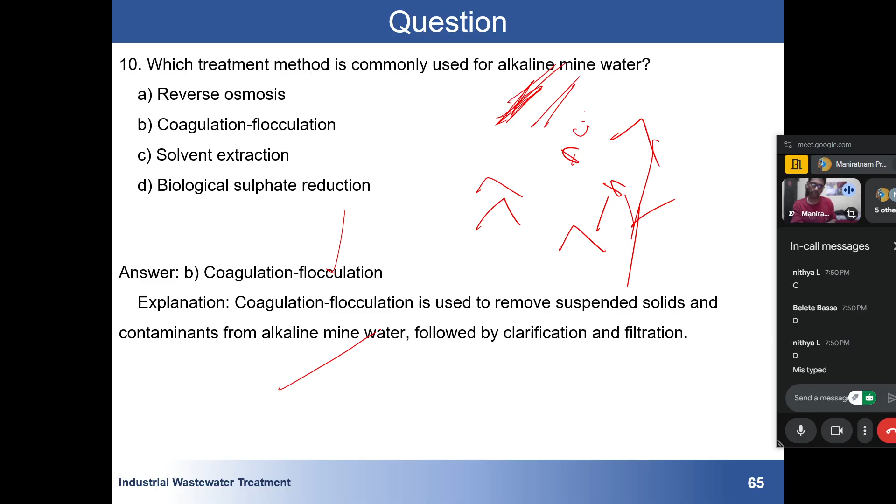Which is the common treatment used for alkaline mine water? Till now we were looking at the acid thing. Now they are asking about alkaline, meaning pH greater than 7. One is saying D, one is saying C. The correct answer is B, coagulation and flocculation. For pH greater than 7, our wastewater is in alkaline condition, so we generally use coagulation and flocculation. When the system goes to the acidic range, we need a special type of treatment, but if the pH is alkaline, coagulation flocculation is sufficient. It's used to remove suspended solids from alkaline water, followed by clarification and filtration.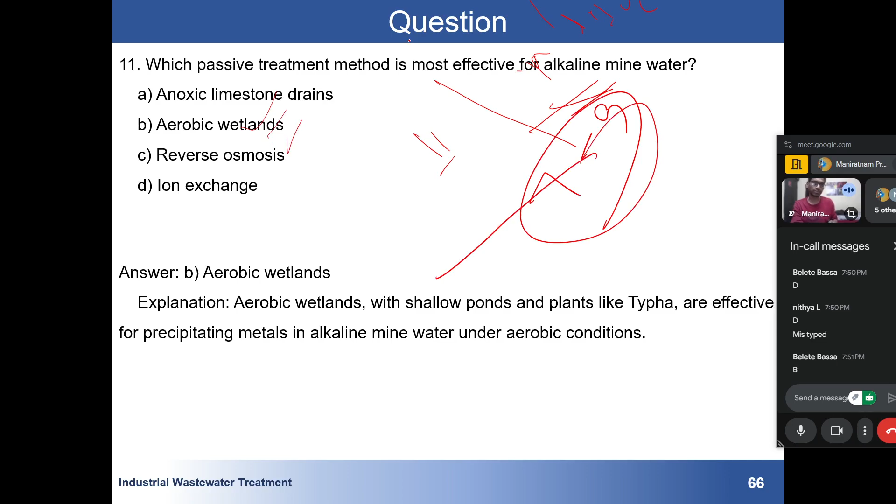What is the disadvantage of the passive treatment method? We have seen aerobic wetlands, but what is the disadvantage? Yes, large land requirement; a huge amount of land is required, and land is very pricey. They require significant land, are slow, but have low energy and maintenance needs. What is the role of anaerobic wetlands in AMD treatment? Again, AMD, acid mine drainage. Drainage means water. Reduce sulfate to hydrogen sulfide. Yes, correct. We have seen oxidation and reduction.

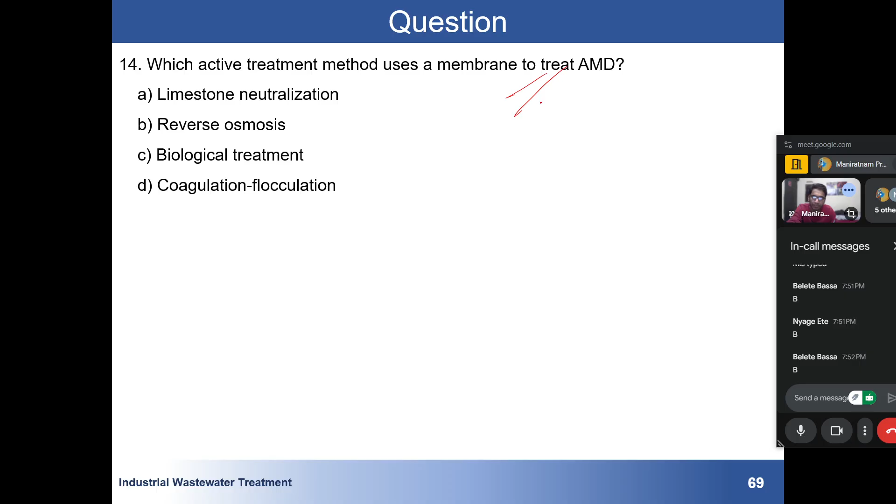Which active treatment method uses a membrane to treat AMD? Reverse osmosis. Reverse osmosis uses a semi-permeable membrane to remove dissolved metals and salts, offering controlled and efficient treatment. What is the primary purpose of CETP? Reduce the treatment cost, because many industries will be there, and for all a common treatment will be there, so it will reduce the cost. Which industry is associated with high COD in wastewater? High COD means high organic. B, paper and pulp.

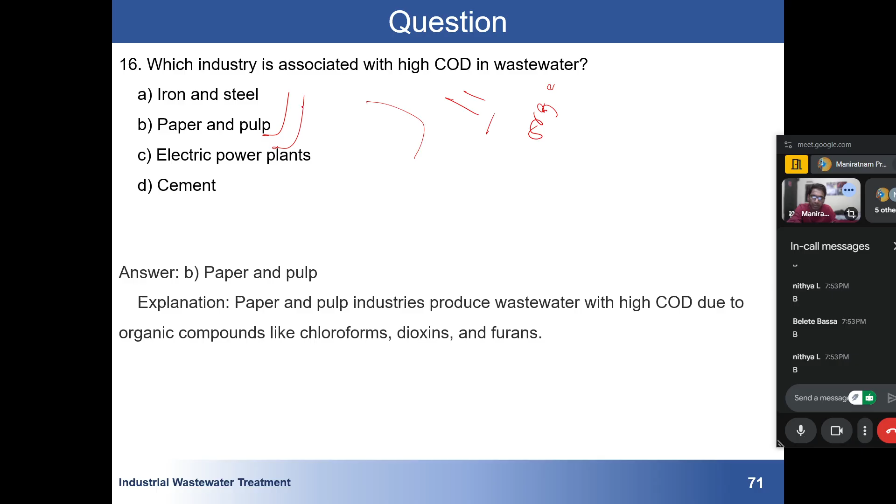Yes. What is the function of the equalization tank in CETP? Water is coming from A, B, C, D. What is its purpose? B, homogenizing effluent by mixing. Yes, correct. Which tertiary treatment reduces BOD and COD by 10 to 15% in CETP? Which of the following is biological? Not biological, but it removes BOD and COD by trapping organic matter.

Activated carbon filter: adsorbs contaminants, reducing BOD and COD by 10%, removing color and odor in tertiary treatment.

What is the key objective of industrial complexing? Options include increase individual profit, share the resources to reduce environmental impact, or eliminate the wastewater treatment. B is the correct answer: share the resource to reduce the environmental effect.

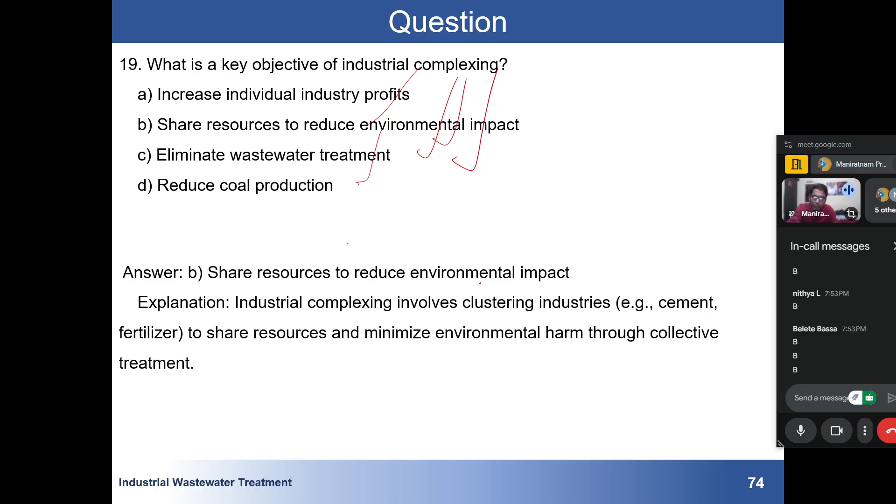And the last question of the day, and the last question of this session also, of industrial wastewater. Very easy question, this thing we have discussed. B is the answer, so this last question was very easy.